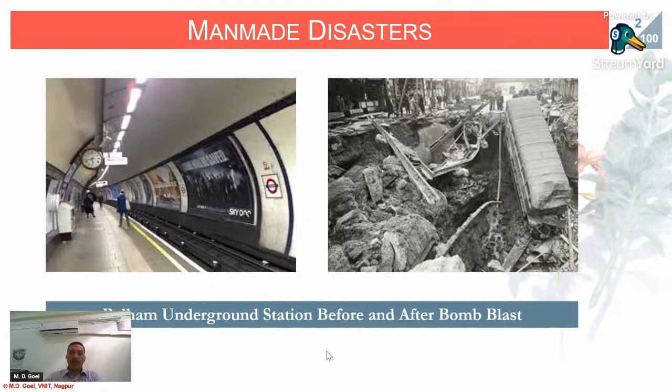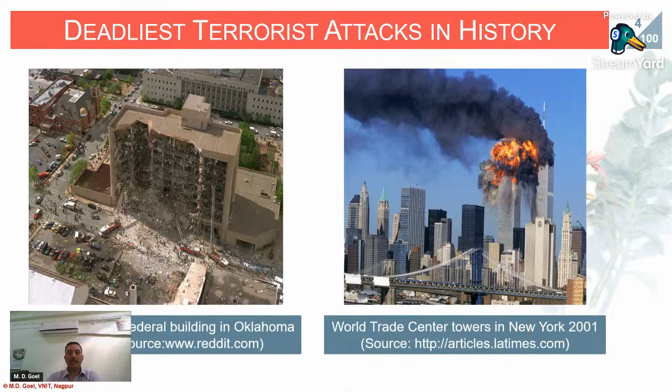In order to design structures against such effects, the other picture shows the Alfred Murrah building in Oklahoma State in 1995, which was bombed, and the world famous World Trade Center in the 9/11 attack. Whenever there is such kind of thing, the structure has to behave in a different way. Since loading is very high and the rate of loading is high, material behavior plays a very important role in designing such facilities.

For this kind of disaster, if you use a normal design philosophy, your structure will become too bulky. So you have to study the effect of strain rate, which is the ratio of velocity of the crosshead to the length of the sample. For example, if you apply a crosshead velocity of 1 meter per second and your sample length is 1 meter, the strain rate will be 1 per second.

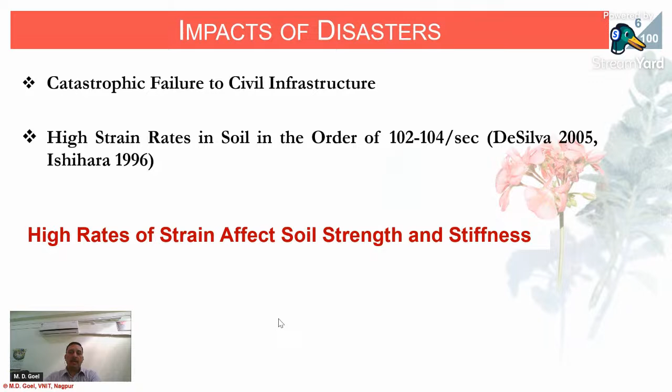When we try to find out the strain rate, material behavior definitely changes. High strain rate values vary from 10 raised to power 2 to 10 raised to power 4 per second. These are important for construction purposes, in order to design a lightweight structure. Another important requirement of studying strain rate effect is the proper use of available material models in computational simulation.

Nowadays we are surrounded by computers, and so many software are available. For example, STAAD, SAP, Abaqus, the finite element based software LS-DYNA, and so forth. So many software exist for civil engineers to carry out their work or research. In these software, many material models exist.

A material model is nothing but the stress-strain behavior of that particular material. The basic stress-strain behavior we studied in undergraduate is sigma equals E into epsilon, meaning stress is proportional to strain. That is one of the simplest, fully elastic material models. But when you go for analysis or design, there exist many more complex material models which take into account many properties of the material.

When we have a prototype structure, we convert this prototype into a simplified prototype. For example, if we have to model a building, we don't model the doors and windows; we just remove them and model the frames. So we make a simplified prototype, and from that we generate a mathematical model. This mathematical model is later converted into the finite element model.

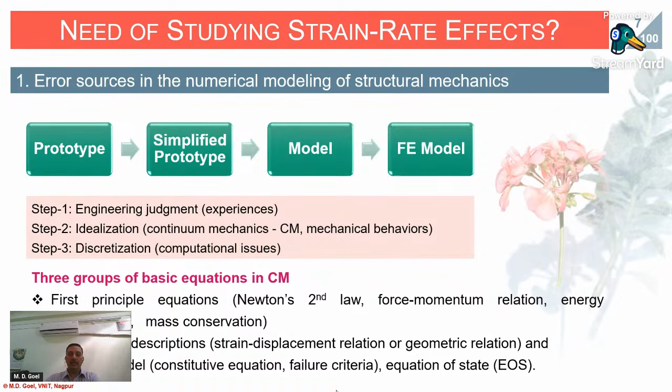Now, when we want to test these materials, we have to understand what equipment is available for testing such materials to study the strain rate effect.

Quasi-static tests are those we performed in our undergraduate studies, like CTM and UTM tests on concrete and rebar respectively. For them, many well-defined models exist.

However, when dynamics is involved, meaning rate-dependent loading that varies with time, it involves strain rate, temperature, and pressure effects. So when you talk about dynamic experimentation, the experimental difficulty increases significantly, with uncertainties and measurement difficulties. Even after so many years of development of such equipment, the physics, mechanics, and mechanism of the material is still not well understood. So there remains a large scope to study material behavior, particularly under dynamic loading.

From a behavior point of view, material can be classified as ductile or brittle. Concrete breaks suddenly, so it is a brittle material. For brittle materials, strain rate affects the strength, meaning the breaking point, like characteristic strength, for example M30, M40, and so on. Whereas for ductile materials like rebars, strain rate affects the flow stress. What is flow stress? We will see in the coming slides.

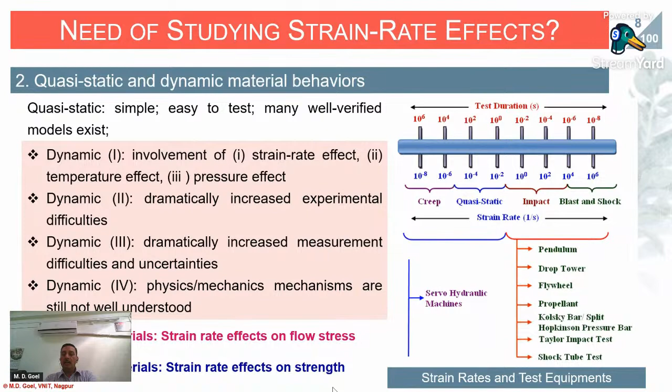This effect of strain rate, when designing facilities against such rates of loading like blast, impact, crashworthiness, and other high rate phenomena, can be accounted for in your constitutive model. This has been permitted by the American Society of Civil Engineers through the definition of some factors, which we will see in the coming slides.

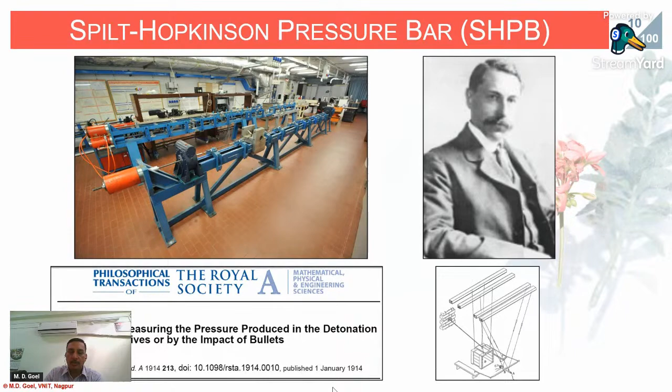Let us first discuss the split Hopkinson pressure bar. This is a picture of a split Hopkinson pressure bar from one of the European facilities where I worked. This is the gentleman, Bertram Hopkinson, who developed this bar, which is used to measure material strength at high rate of loading. This apparatus is also available at VNIT Nagpur in my lab.

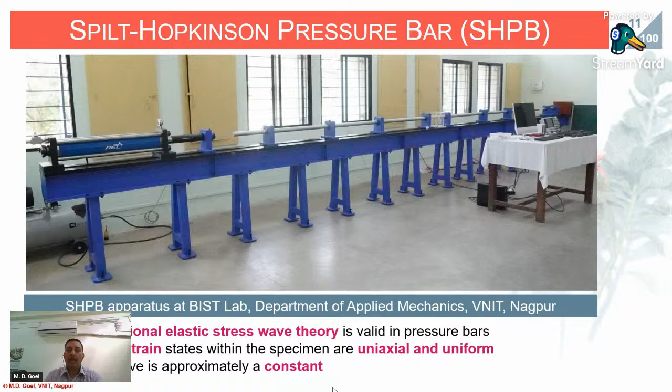It works on the one-dimensional elastic wave propagation theory, and using this apparatus we can generate the stress-strain curve of a material under compression loading. This is a very big equipment that we use to find out material behavior. Let me show you some video.

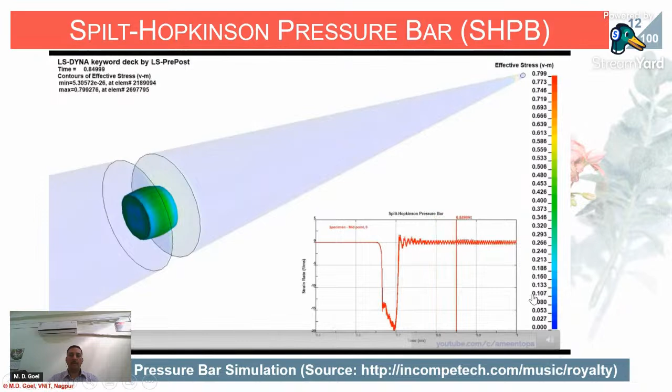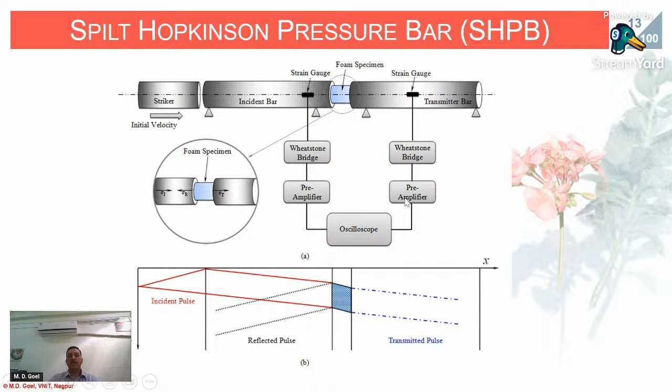This is the schematic diagram of this whole process. We can keep the sample here, measure the incident strain, measure the reflected strain, and measure the transmitted strain. Then using the stress strain principle, we calculate using this one-dimensional wave propagation principle the structural behavior or stress strain curve of these materials.

Now, this was a little bit about the use of experimental concrete testing at high strain rate. Now people throughout the world are working in these areas and they have developed codes or references for this purpose. For example, if we talk about steel, when subjected to high rate of loading, there is a large change in the strength value, which we will see.

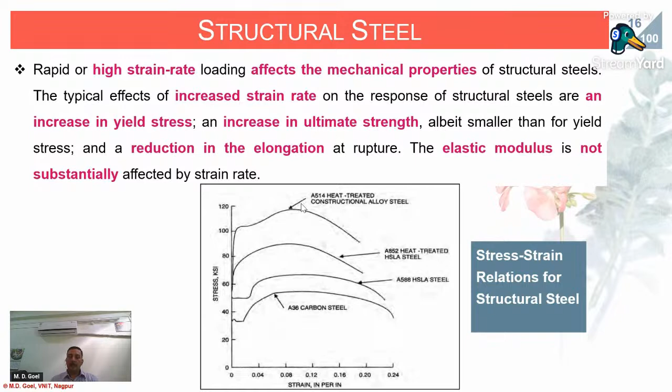So here you can see different types of steels and their stress behavior as per the US code. When you subject these specimens to high rate of loading, their strength increases. For example, if we say Fe415, if you subject it to a strain rate of let us say hundreds per second, this Fe415 may reach up to 700 MPa. Similarly, M30 concrete, when tested at 100 per second strain, may reach 90 MPa.

So what is the advantage? Why is it not available at quasi-static level? Because in the quasi-static region, the molecules get time to readjust themselves. They get sufficient time, but in the dynamic region, they don't get time, and they offer resistance against deformation, and this resistance results in the increase of dynamic strength.

So the ratio of dynamic strength to static strength is called the dynamic increase factor, which is generally mentioned in many codes, and we apply that. For example, when you are designing a steel structure, when the structure is subjected to earthquake or wind loading, you generally increase the steel stresses by 1.33 times, or 33%. This 33% factor is coming from this kind of a test.

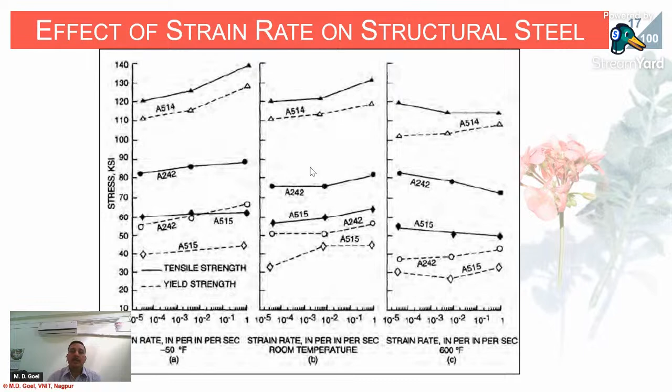This slide shows you the effect on stress with respect to change in strain at room temperature, at minus temperature, and at higher temperature. So when you are designing any facility, for example, a component of an aircraft, you have to do this kind of test and see, at varying temperature and varying strain rate, how the material is behaving.

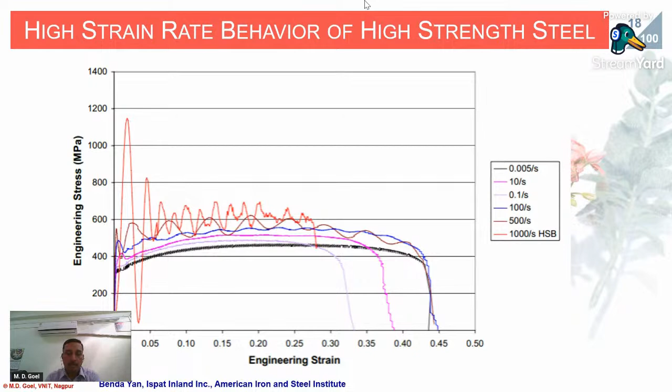However, the strain is reduced, but that's okay, because we need the material to perform or resist this load at a very high level rather than this. So a similar chart can be developed for different temperatures.

If we talk about aluminum, it has a yield stress of around less than 200 MPa. When subjected to high strain rate, the strain rate achieved was around 175 to 180 per second, as seen in this strain rate versus time curve, shown in the second curve. With respect to this, you are getting a higher strain rate and a higher strength of 300 MPa.

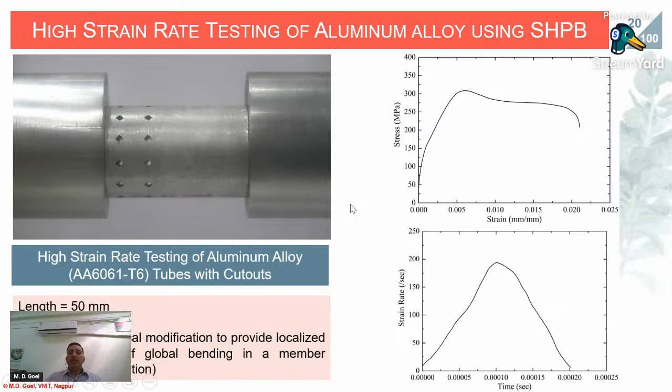So you can say there is a sudden increase in the strength of the material at such rate of loading. Bischoff and Perry compiled all this data from the beginning of 1917 till 1985, and this data is further improved by many researchers. So here you can see, if you calculate the relative increase in compressive strength, that means the dynamic strength divided by the static compressive strength, you get a factor of 1, 1.5, 2, or 2.5. So if you go for 100 per second strain rate, your strength is increasing at least by a factor of 2.25. This type of factor can be used in the design of a concrete structure.

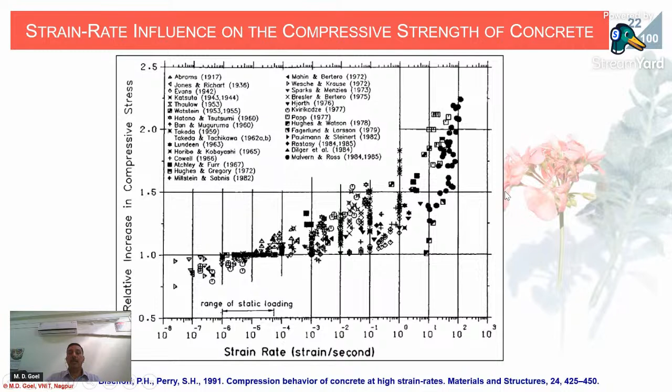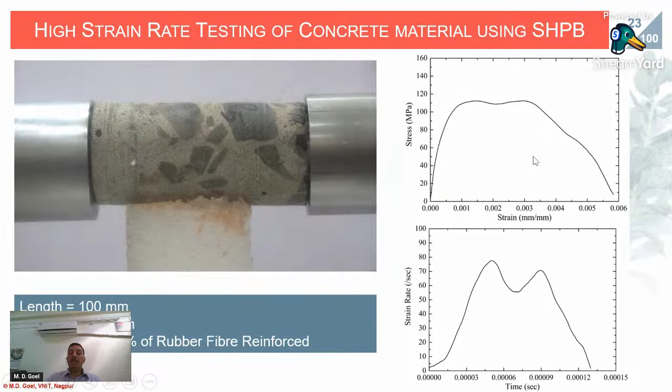This typical slide shows you the effect of strain rate, which was tested for M25 concrete. M25 concrete was tested at 0 per second, meaning quasi-static, and we kept on changing the strain rate up to 1000 per second. So you can see this M25 went up to 130 or 140, 150 MPa. So it is giving you a four-fold increase in the strength, and similar behavior will be observed with respect to Fe 250, 415, 500, and so on.

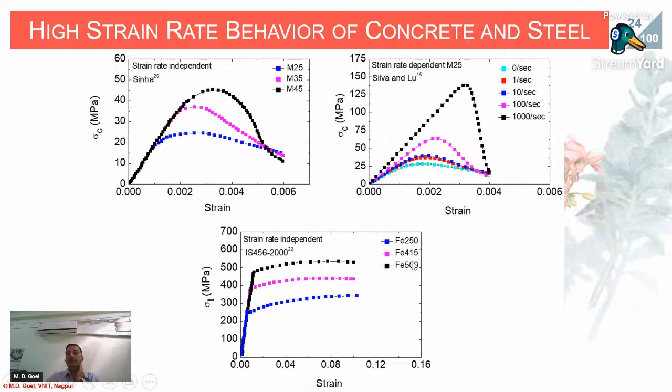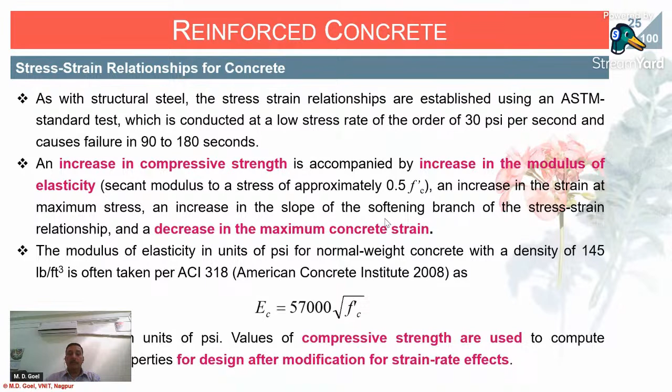So it is not possible for everyone to account for this kind of testing. So what people have done in the code is incorporate it in terms of some values. So when you talk about values, these factors will come in. The Comité Euro-International du Béton committee has included this factor in terms of a relative strain rate.

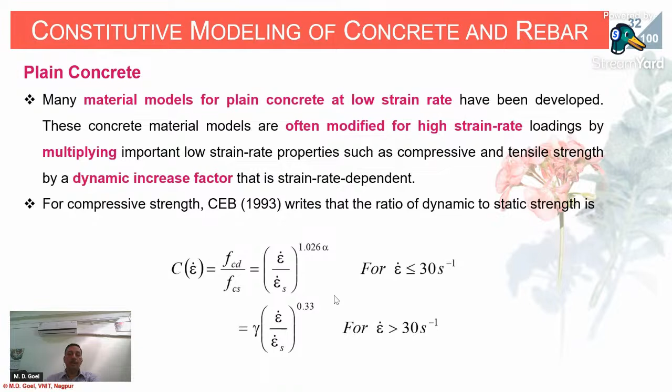So they provided this formula. If your strain rate is less than 30 per second, then you can use this kind of formula and you need not carry out the test. But if it is greater than 30 per second, then you have to use this other formula. Although this formula is quite old, it is still valid. My suggestion is that if we have new formulas available, which have been developed by several researchers, then we should use those instead of sticking to the old formulas.

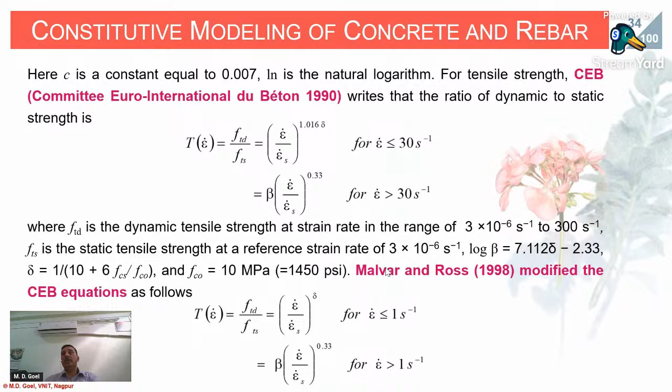There exist different relationships in the literature which help you calculate the strength of the material if you know the varying strain rate. For example, if you are designing a facility or a crash barrier made of concrete, you expect that a vehicle is hitting at 80 kilometers per hour. You can calculate the total deformation in the sample and the strain rate, and then use that strain rate to calculate the strength of the material. This kind of relationship is old, but it will serve as a guide to you people in the beginning.

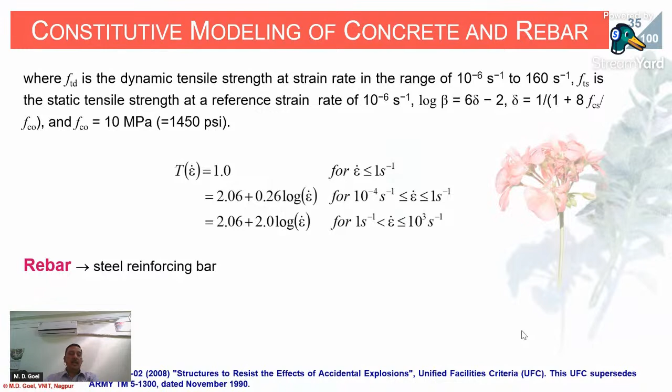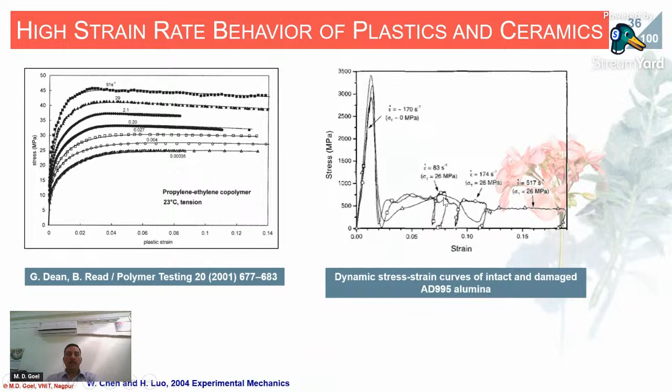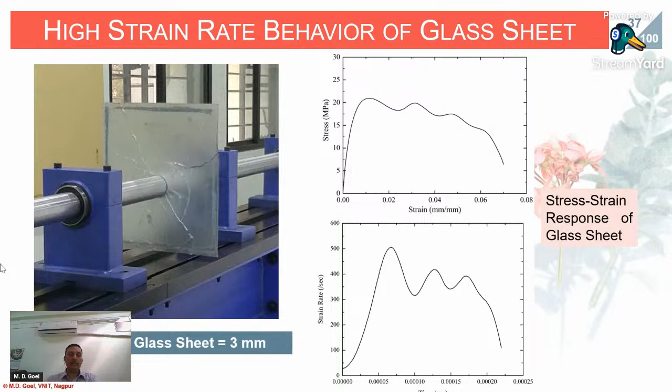You see how the glass is breaking and how the bars are moving. I'll play this video once again. We have recorded this at slow motion, so using this photography or other photography techniques, you can also calculate how the material is getting fractured. Just have a look at how this fracture is happening. So this kind of work can be done.

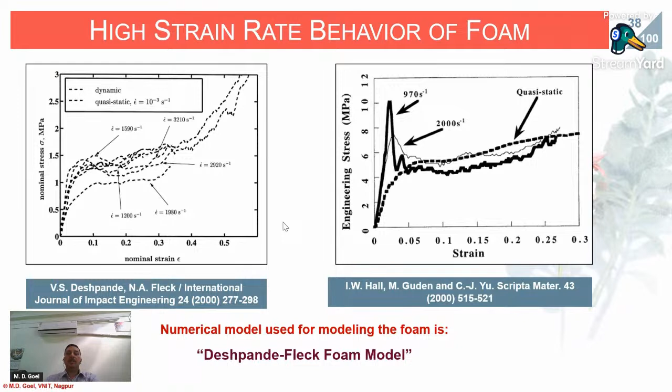Now this slide shows the effect of strain rate on foam material. Foam is generally used for insulation purposes in cold countries, as well as for energy absorbing devices, packaging and other things. So foam is subjected to high rates of loading, and people have worked on that. My PhD itself is on this topic. This is a typical Deshpande-Fleck foam model available in LS-DYNA as well as in Abaqus. Using such kind of a test, you can calculate the stress strain behavior of foam material also.

This is metal foam behavior; different types of foams exist. It is not always true that a material will keep increasing its strength as you keep increasing the strain rate. Rather, there exist many materials which may reach a limiting value, and afterwards the strength of the material starts decreasing.

This is a material made of aluminum, having cenosphere inside it. Cenosphere is nothing but hollow foam, hollow balloons made of silica. These are inserted in the foam, and then we tested this material at high rates of loading, and we found that after a strain rate of 750 per second, the strength starts decreasing. So you can see that after a strain rate of 750, at 900 and 1400 the strength is going lower. The same behavior is observed here also.

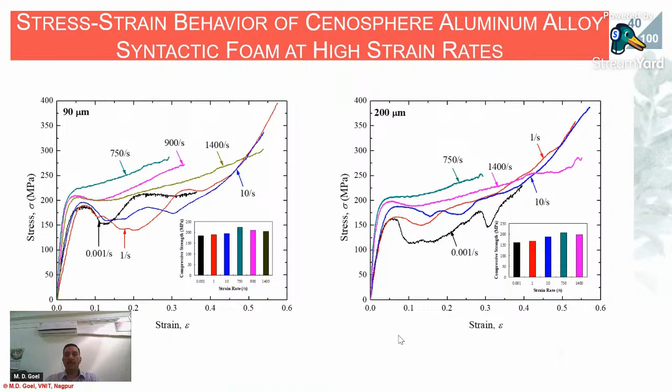So we concluded based on this analysis that one has to study a material over a large or wide range of strain rates, so that the effect on the material is clearly understood.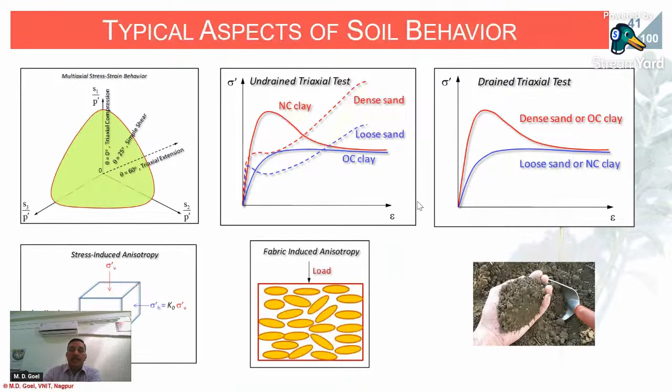Now, when we talk about soil, it is one of the most important constituents of the construction industry. Every foundation rests on soil, and the foundation may be subjected to dynamic loads due to machine movement. So the effect on the soil will also show strain rate effects, and this can be investigated using such kind of a test. So we can test the soil, and I'll go briefly through this here.

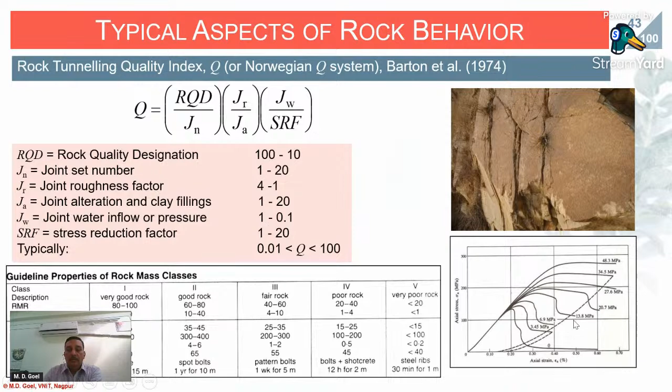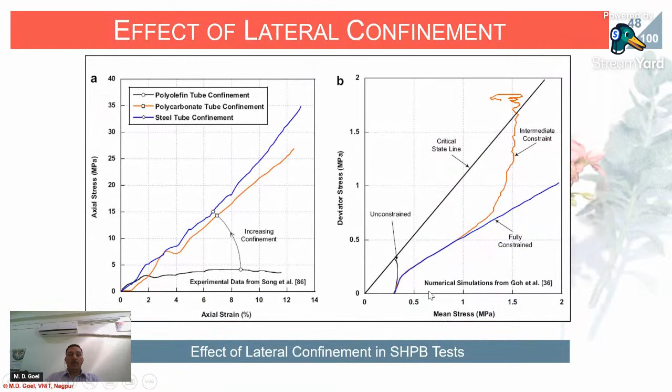So when you are designing any underground facility like metro tunnels, tunneling, bunkers or shelters which are subjected to high rate of loading, you can take this into account. Based on that, one person, Omidvar, gives the dynamic increase factor for sand also. This is a very gray area, particularly when we talk about research.

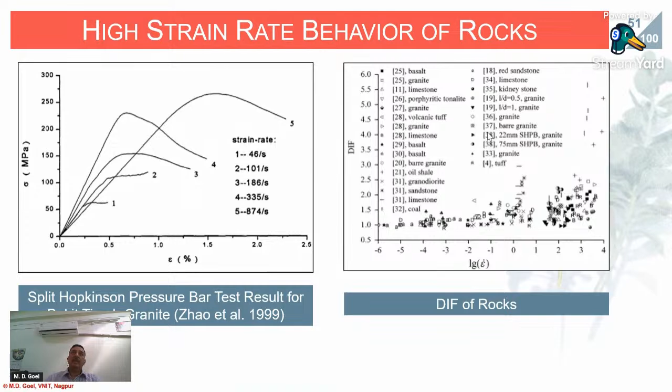This is typically the stress strain response of a granite material, available in the literature. Now, a lot of people are studying rock behavior under high strain rate loading, because in India now lot of mountains, bunkers, and underground facilities are being constructed. Behavior of these rocks must be known at high rate of loading to design these facilities, otherwise if you design by considering only static loading, it will be highly uneconomical.

So this is a typical test carried out on rock samples at our VNIT laboratory in SHPB. Here you can see how this sample is deforming. Here you see the crack has appeared only.

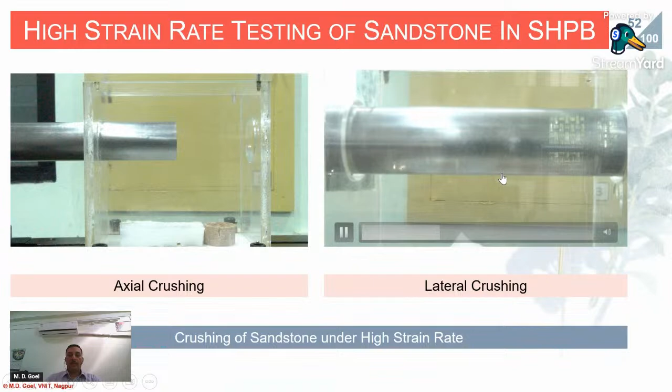Now let us see the dynamic test, another tensile testing, split tensile test. Here you see the sample is completely crushed, and then we can test this material and generate the stress. Now it looks very easy that we are putting some samples between two rods, firing it and doing some test, but it is very complicated.

Since SHPB was basically designed for metallic materials, nowadays it has been extensively used with certain modifications for non-metallic materials. So many times researchers who don't well understand the basic principle of split Hopkinson pressure bar, SHPB, misinterpret the data.

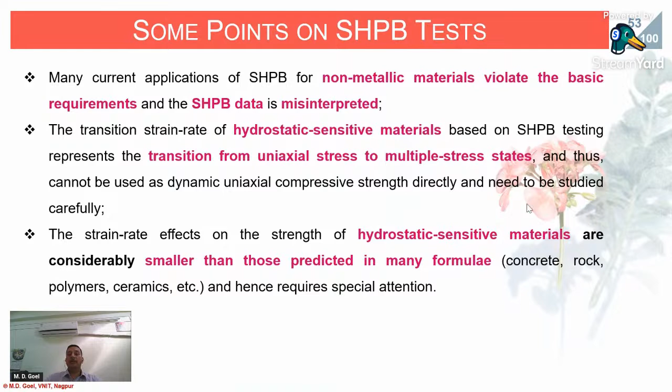Materials which are typically hydrostatic-sensitive materials have issues with transition from uniaxial stress to multi-axial stress, whereas in SHPB we always talk about the uniaxial state of stress. So concrete, rock, polymer, ceramics basically are materials which have a smaller effect on strength as predicted by many formulas. So we have to be very careful in this analysis.

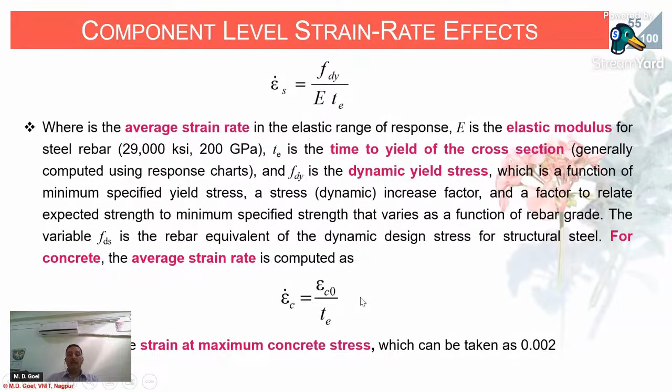Once we have this dynamic strength, you can calculate dynamic strain rate, and then dynamic strain rate can be used to study this. There is a code called UFC 3340, which gives the dynamic increase factor. If you are not working in research and you want to design these facilities, then you can use this.

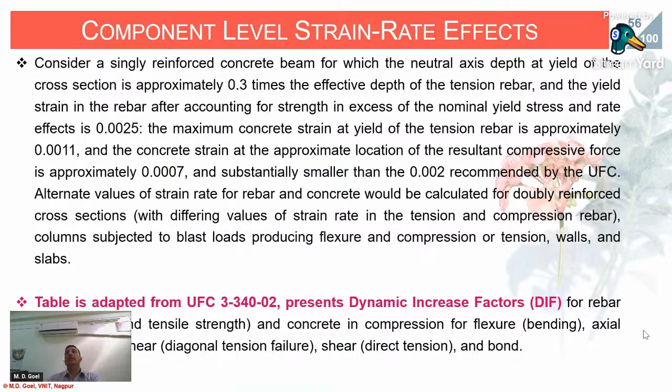To calculate the dynamic increase factor for designing this facility. This is similar to the factors which we apply to the load using IS 456 or IS 800. These factors are available for every type of action.

For example, this is a chart adopted from the Department of Defense, US. If there are two conditions given, low pressure and high pressure conditions, what is the effect on rebar yielding, tensile, and as well as concrete is given. So for rebar, two parts are there: yielding and ultimate tensile strength.

If we talk about flexure and flexure yielding, the factor is 1.17. For example, if we have a bar of 250 or 415 MPa and we want to design it for yield, its strength can be enhanced by a factor of 1.17, whereas in case of tensile it can be increased by just 5%. For compression, it is 1.1 and 1. For shear, diagonal and direct, it is 1 and 1.1. For bond, it is 1.17. Whereas for concrete, flexure has a factor of 1.19, compression is a factor of 1.12, and so forth.

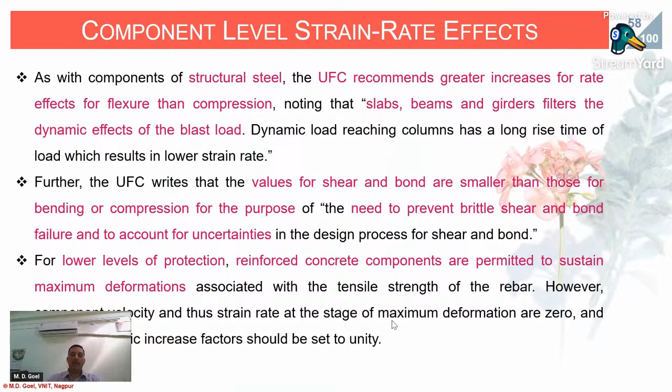So if one does not have a detailed idea, he or she can use this chart to design the facility. But one has to understand that since such facilities are designed for once-a-hit in a lifetime, you can be a little conservative in this designing, because it is very difficult to perceive the threats which are happening or going to happen on such a structure. So you can be a little conservative in designing this work.

This is the chart given in UFC. It shows the dynamic design stresses depending upon the rotations. If we talk about flexural action, we have rebar which can be in tension or compression, and if the dynamic or support rotation is within 0 to 2 degrees, then fdy1 will be used along with f'dc. This f'dc is given in this chart at the end of the code. Accordingly, you can define the dynamic strength of the rebar and the dynamic strength of the concrete, and how it correlates with the rotations. So if rotations are higher, your design strength is going to be lower.

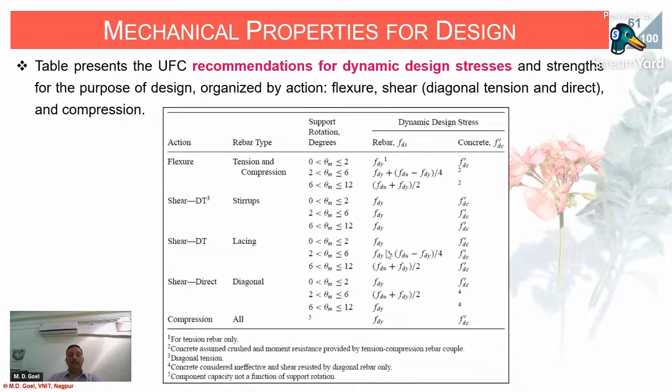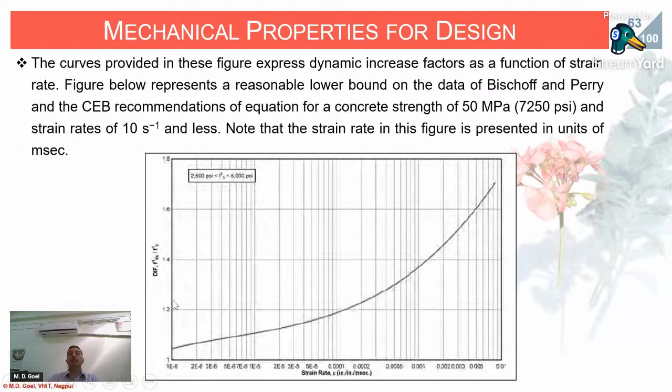This is another curve for M50 concrete. It is given in terms of dynamic increase factor by the European Union's CEB, Committee Euro International du Beton, with the strain rate effect given in milli per second. So if you have a strain rate of, let's say, 0.0002 milli per second, you read this value and use a factor of 1.21. This is basically the representation of Bischoff and Perry's charts, the other one.

Now let's say we have a yield strength, with this data taken from American steel, and for tensile strength of the rebar as presented by Malvar in 1998. So grade 40, grade 60, 75, and so on, with respect to strain rate up to 100 per second, he has given these values. You can directly use these charts to find the dynamic increase factors. Once your dynamic strength is increased, you are definitely going to get a smaller area of steel required.

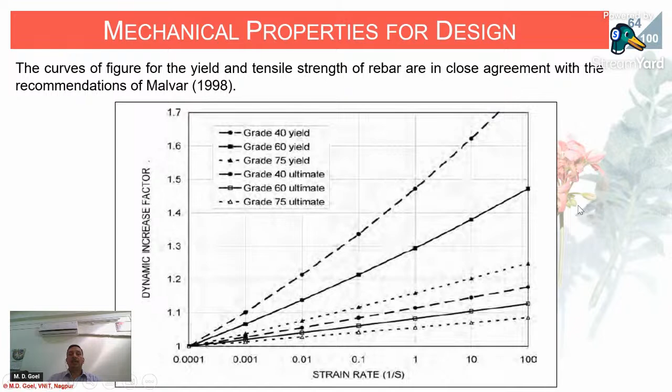Once you have this set up, you run the program and the wave will travel from one end to the other. You get the collection of reflected strain and transmitted strain, and using these principles you get the strain rate time history and the strain time history. Combining these two, you remove time and get the stress versus strain history. So if time is removed from epsilon-s and sigma-s, you get a curve -- this is the typical curve we saw a few slides ago. So one can develop his FE model and keep testing.

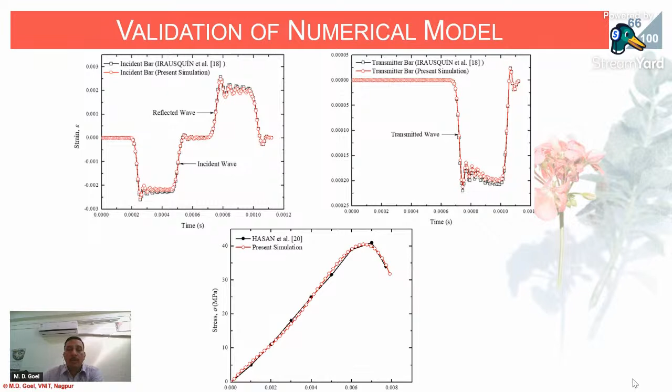What is the advantage of doing this? First, you can reduce experimental effort, because here you can run n number of models with varying end conditions, varying materials, and varying constitutive laws. You can understand the physics of material behavior better than with experimental tests, because experimental tests are very costly and carrying out such tests is very challenging. So we used this approach and calculated the complete stress-strain behavior of different materials.

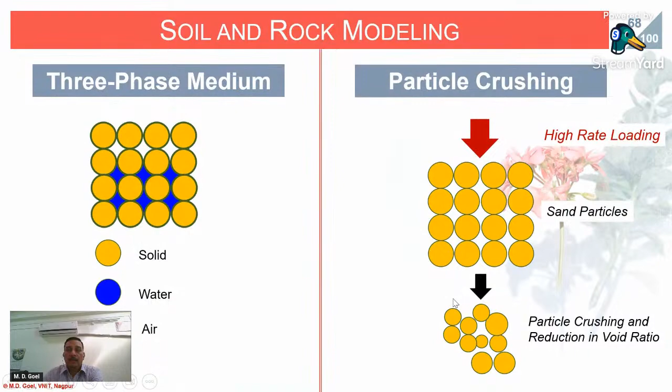This is just some basics of rock and soil mechanics -- I will skip that, because now another part of this study is the shock tube study. When you have to design a facility against blast or impact, you need to understand the behavior of material under that type of loading. Since handling of explosives is not allowed in academia and is restricted in many countries, including India, we cannot carry out blast tests or such explosive tests on our own. But there exists another mechanism called the shock tube. In a shock tube, we supply a simulated blast -- basically, a shock tube deals with compressed air force.

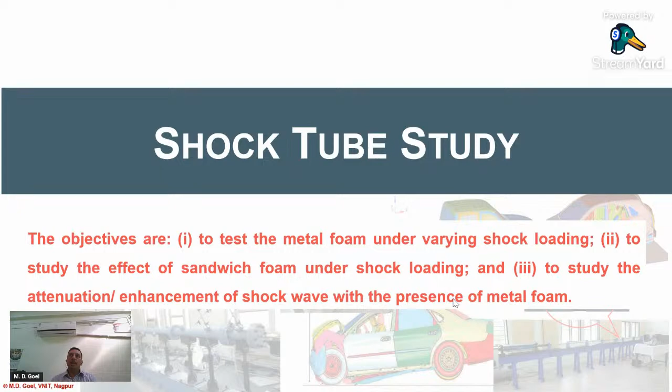So we will have a section which is high in pressure. This is the typical shock tube which was used by me during my study in Germany. This shock tube has one section which is called the high pressure region, and the other one is known as the normal or ambient condition. In between these two there exists a diaphragm.

A diaphragm is nothing but a very thin material. When we suddenly suck out the air between these two sections, there are two diaphragms basically, so there is a low pressure region between these two diaphragms. In the high pressure region, air is forced towards this, it breaks the diaphragm, ruptures the second diaphragm, and then a shock will travel. So a discontinuity is generated, and this discontinuity will travel down through a long tube which you can see, and will hit the material.

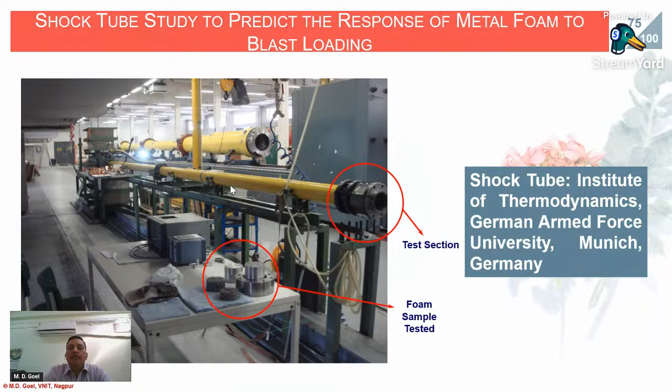Let us see this shock tube facility at Sandia National Laboratory, how this material is tested.

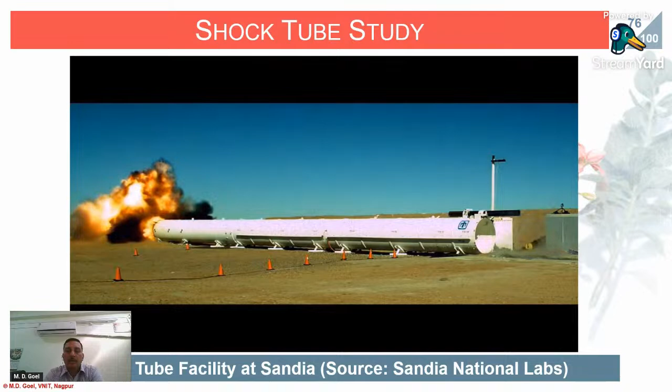So it is fired now, you can see, and the compressed air is coming from outside. Now it is showing extreme blast environment simulations.

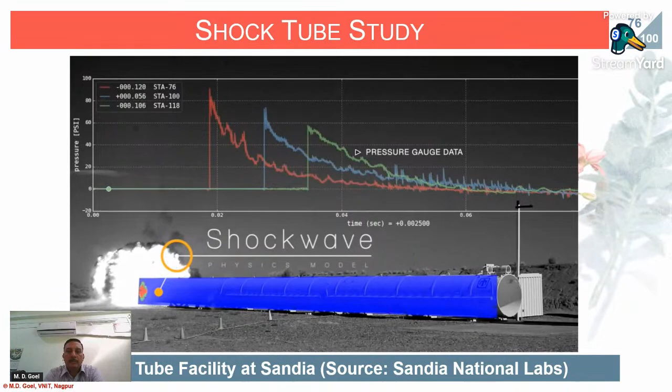Here you can see the shock wave is traveling. We have put pressure gauges and now it's getting it. So here the shock wave is moving, how the shock is moving, and this is a sudden rise in the pressure.

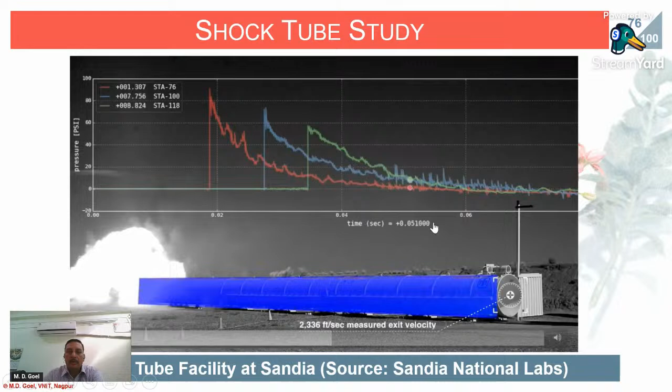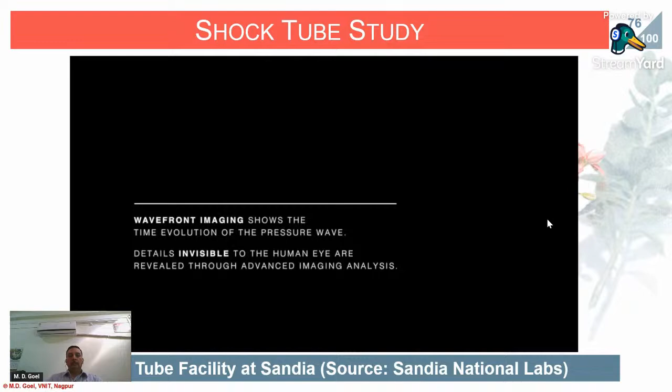At this location we have kept the testing material or testing gauge, so that's why we are observing a sudden rise in pressure. It is moving, second gauge is there now, third gauge is there at the exit, and now you can see how the wave is coming out. So this is the velocity of the wave which is measured.

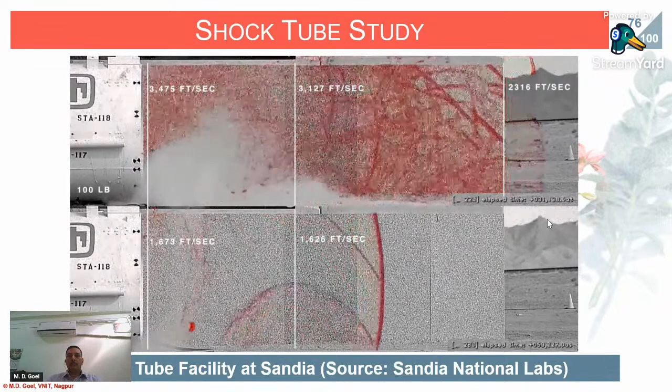Using such kind of a testing system, you can exactly play with the material. You can understand whether my material is going to sustain such kind of loading or not. These are very small scale equipments as compared to your real time structure, but these equipments help you to understand the behavior of material at that rate of loading.

For example, let us say we have a nuclear containment structure and a plane is striking. Another example is WTC. So now can I design my structure, which is very important, so that even if a missile or plane directly hits this structure, nothing should happen to it. Any containment structure, like a nuclear containment structure, is housing radioactive material. If that is leaked, then a lot of people will die.

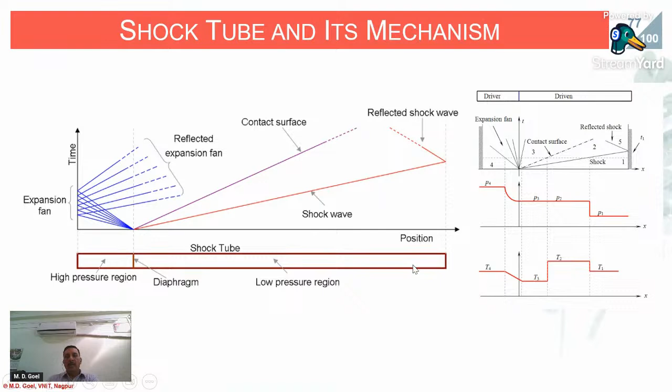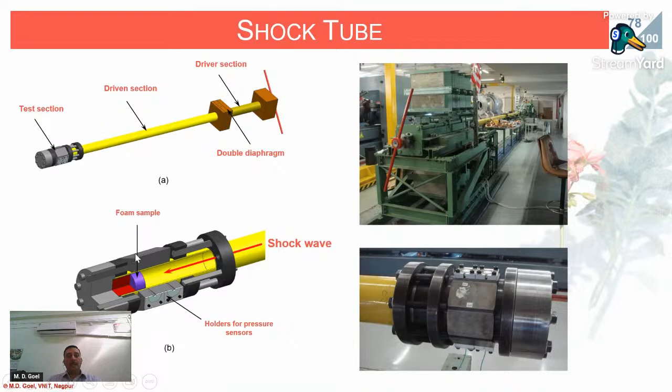So here the shock will come, it will impact the material, which will deform. You can capture all this deformation and then later analyze the structure. So this is the data acquisition system which was used. Here you can see we have an oscilloscope, an amplifier, pressure sensor gauges, and complete data cables or attachments to fire the shock tube.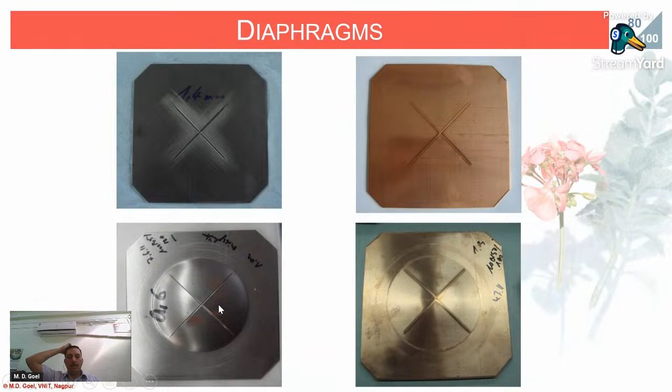So we fired this, and it does not open fully. Here in the down-line left side image you can see it was deformed, but it was not opened fully, so the shock could not travel to the other end. The same thing happened with this one. We tried several combinations, and finally we were able to achieve it. Sometimes it was partially opened here, where you can see my cursor, and at the end we finally achieved how it shall open.

So it opened like a flower petal. Once it is opened like this, the full shock wave will travel to the end, which is called a planar shock wave. We tested so many combinations of these and then optimized the opening of the diaphragm.

So these are typical metal foam samples which were tested. Metal foam is nothing but aluminum, like the utensils we have made of aluminum. When we foam it, it becomes metal foam. You will be surprised to know that the density of this metal foam is only around 200 kg per meter cube. So it can float on water, but the property is that it absorbs a large amount of energy.

So when you compress this, layer-wise deformation happens in such materials, and they absorb a large amount of energy. So they can be used as a sacrificial layer for protection of structures against blast or impact. This helps you understand the mechanics of energy absorption. Similarly, you can make samples of concrete, polymeric materials, or any steel plates, to see how they deform under such loading.

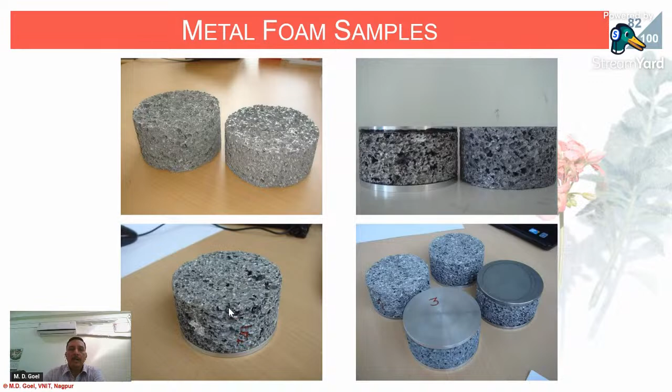So this is the situation of samples before and after the test. We did this test in the shock tube, the samples were placed, it was fired, and loading was applied. Here you can see how the samples were completely crushed. Once it is crushed, it gets reflected back into the shock tube, and we have pressure sensors or gauges located at different locations. Using those pressure gauges and sensors, we collect the data and see how much energy is absorbed.

The interesting part was that before this test, we understood that all of these samples would absorb the energy and not cause enhancement in the incoming energy. But many times when we did this test, we were surprised to find that at a particular level of loading, they were causing enhancement of the reflection rather than reduction in the loading. That was a very interesting point, and it led to understanding the importance of such kinds of tests.

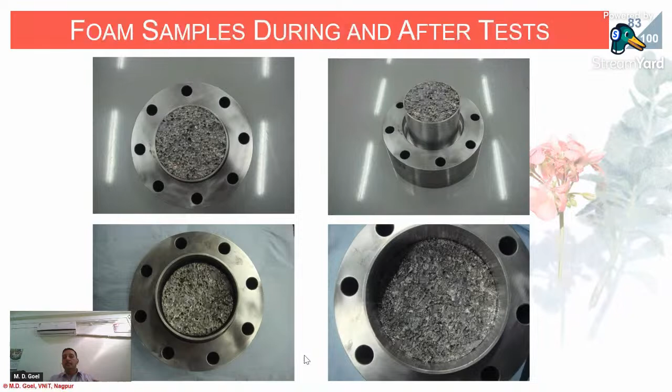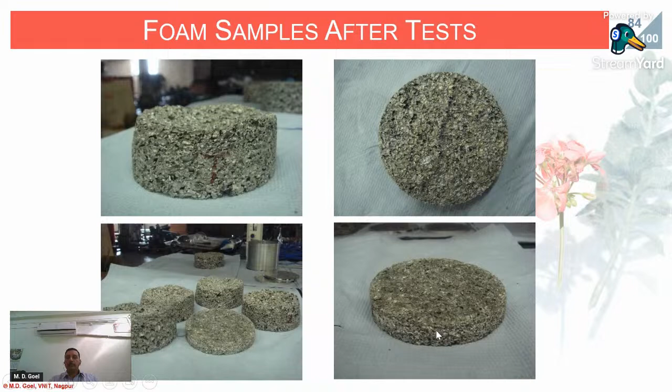So these are the foam samples, before, after, and partially deformed. Here you can see the thickness of the sample was 50 mm, and finally it was reduced to less than 1 centimeter after the test. Layer-wise deformation was observed along with complete deformation.

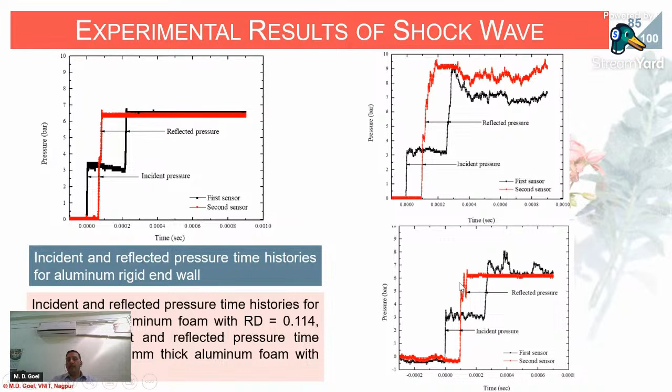Here you see the pressure versus time curves we got, with an incident pressure as well as a reflected pressure for two sensors, and for different densities of foam. We can see that some of the pressures were higher, some lower, and with different types of foam we were able to calibrate the data on the behavior of the material.

So now this was about the metal foam. Now coming back to shock loading on soil, we have this kind of behavior showing shock velocity versus particle velocity. If you keep on increasing the particle velocity, the shock velocity will also increase.

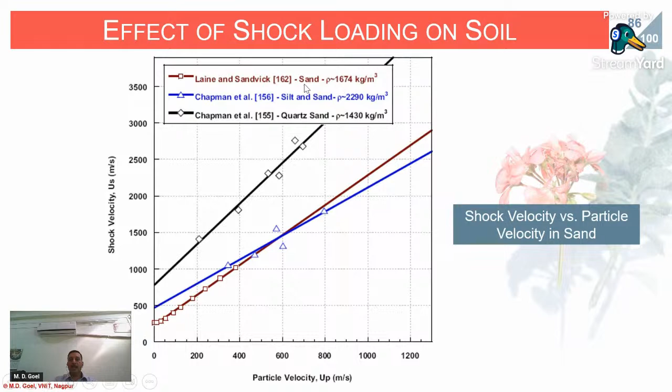If you have a varying density of the sand, like soil, silt, and sand quartz sands, their behavior is also different. So all this data is basically required when you want to use it for modeling, whether in SAP, Abaqus, or anything else, to be used in a constitutive model.

So whether you are going to use shell elements, solid elements, or make beam-column connections, you can use this test data to model the material behavior at that rate of loading.

For example, let us say I have a building which is going to be subjected to some kind of missile attack. Now I must know what types of material to use, what is the behavior of that material at that rate of loading, and how to diffuse this. Combining all these things can be achieved by doing tests using SHPB or shock tube and developing such relationships.

This is a very important relationship, particularly for structural steel, called the Johnson-Cook material model: sigma equals sigma 0 plus A times epsilon raised to power a, times 1 plus B ln(epsilon dot / epsilon 0), times 1 minus T star raised to power b. It has three parts.

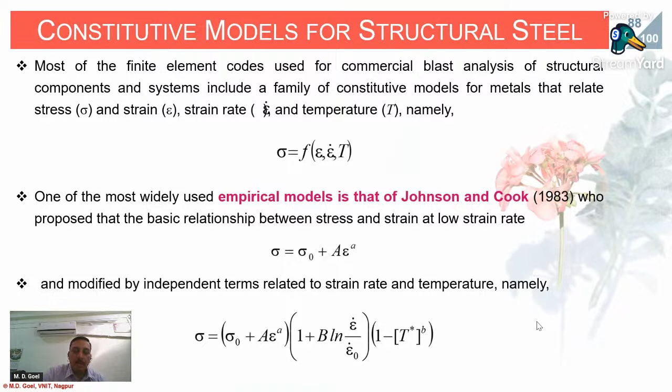One is the elastic-plastic part, which we generally study in structural engineering. The second part is strain rate, which we talked about today, and the third part is temperature. The beauty of this model is that even if you remove one part—say I did not carry out temperature study, did not subject my samples to higher temperature—I can remove that part and the formula still works. If I don't have temperature or strain rate effects, I can remove the last two terms and work with just the elastic-plastic material, which is very useful.

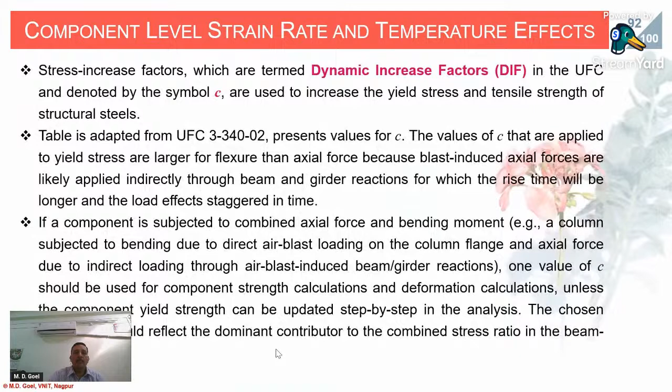It is given that if it is in flexure, low pressure region or high pressure region, then use these factors. Similarly for axial, low pressure and high pressure regions, and for tensile strength, what is the dynamic increase factor. You see, the increase factor given here is very small because of the uncertainty involved in such testing.

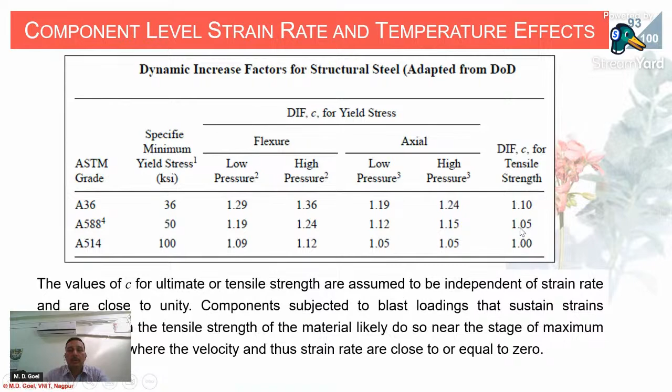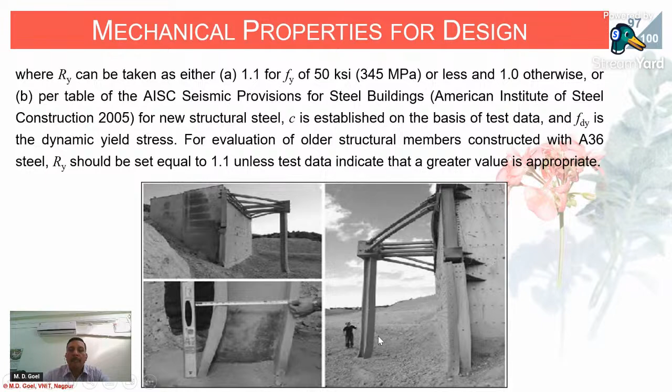This is a typical real-time test carried out on a steel column as well as an RC building—it was a composite building. You can see some blast tests carried out at one of the test facilities, with columns made of I-sections and structures made of concrete. The blast was carried out and it was observed how the column deformed. Here you can see at the bottom the deformation in the column, how it is bending, and then it was analyzed to understand the effect of strain rate.

So I think that's all for me today because I tried to cover the basic ideas of this topic. I think I'm quite ahead of time and I'll be happy to discuss with you people if you have any specific queries. Thank you very much.